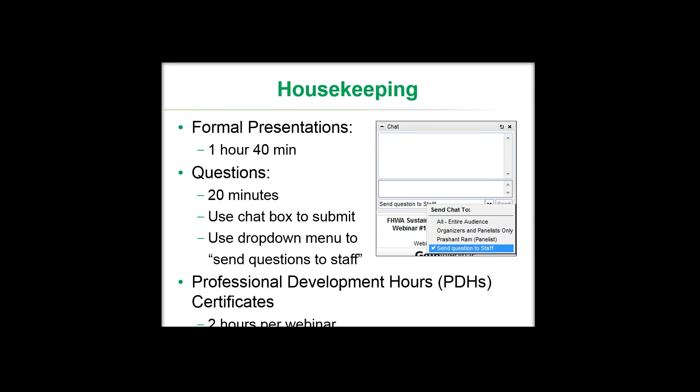As I mentioned, this is our second presentation within the webinar series. Several weeks ago, we presented an overview webinar on pavement sustainability and ways of assessing pavement sustainability. Today we're going to be focusing on sustainable strategies for asphalt pavements, covering materials, design, and construction aspects. Our speakers for today include Gina Ahlstrom with the Federal Highway Administration, Tom Van Dam with NCE, John Harvey with the University of California, Davis, Imad Al-Qadi with the University of Illinois, and Hassan Ozer with the University of Illinois. Again, my name is Kurt Smith, and along with Tom Van Dam, we'll be moderating this webinar.

So now let's begin the webinar by hearing first from Gina Ahlstrom, who will provide some background information on FHWA's Sustainable Pavements program. Gina?

Okay, good afternoon. Let's see. Okay.

So to start off, the U.S. DOT is committed to advancing sustainability in all aspects of transportation. Secretary Anthony Foxx signed a policy statement in June of 2014 that demonstrates this commitment. We are encouraged to consider sustainability in our policies, operations, investments, and research.

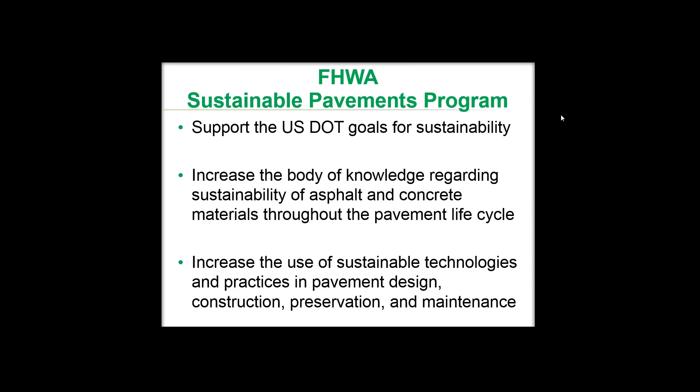The first order of business under the program was to define what sustainability means in terms of pavements and materials. It is necessary to give practitioners guidance and clarification on how pavements and materials fit into the broader concept of sustainability. The document Towards Sustainable Pavements, a reference document, is just that, a reference.

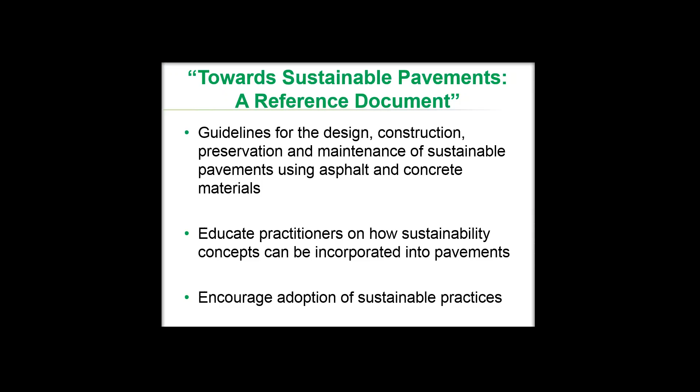It provides guidelines for the design, construction, preservation, and maintenance of sustainable pavements using asphalt and concrete materials. Its goal is to educate practitioners on how sustainable concepts can be incorporated into pavements, and it encourages adoption of these sustainable practices. What we're focusing on is what we can do today to incorporate sustainable practices into our pavements.

The document provides a comprehensive review of current literature specific to pavement sustainability. We had an extensive review of the document with input from stakeholders. And rest assured, this is a comprehensive document that benchmarks pavement sustainability today and helps us look at improving and moving that benchmark in the future.

With that, I will turn it back over to Kurt. All right. Thank you, Gina.

We appreciate that background. And with that, we want to now start moving to the main focus of our webinar today on asphalt and asphalt pavements. To begin with, we're going to have a presentation by Tom Van Dam, who will be presenting on materials and materials considerations of life cycle and aggregate materials. So Tom?

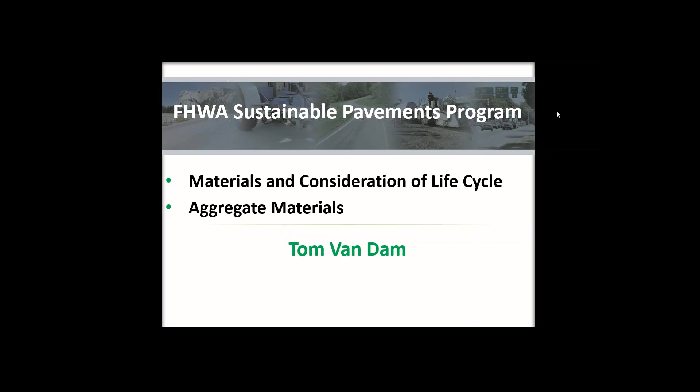Thank you, Kurt. It's nice to be the beginning of the focus.

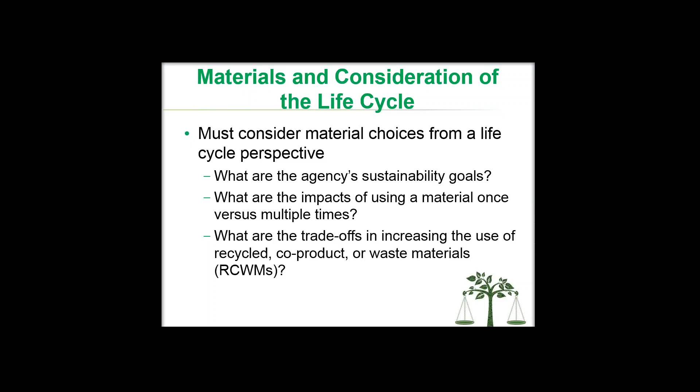These are worth talking about in a little bit more detail. There seems to be some subtlety between the different types of materials within this category, and that subtlety is important later as we consider analyzing the environmental impact of these materials using something like a life cycle assessment. A recycled material is one which is obtained from an old pavement and included in a new pavement. A very common example is RAP, reclaimed asphalt pavement, or recycled concrete aggregates, in which we take existing concrete and recycle it back into aggregate for a new pavement.

A co-product is a material which comes from another process, but that brings value. These are often industrial processes. A good example in pavements might be slag cement, which is pulled off of the molten slag coming out of an iron blast furnace, and specifically processed to turn it into a cement for use as a binder.

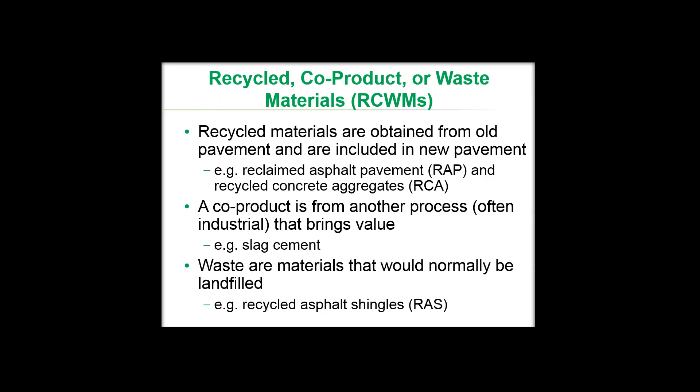Wastes are materials that would normally be landfilled - streaming towards the landfill, but that we can beneficially use. A very good example seeing increased use in areas which have a supply of asphalt shingles is recycled asphalt shingles, or RAS, where we can take these shingles, process them, and use the binder and aggregate in a new asphalt mixture. Something like fly ash in concrete is a little bit more complicated - it depends on region and quality of fly ash. It could be considered in some cases as a waste, but in most other cases as a co-product, as its value is greater than that of transportation and disposal.

When we look at the use of our RCWMs, a lot of questions arise. Does this material bring equivalent or better performance? That's a very common thing. What if the performance is slightly worse? That's a whole other consideration.

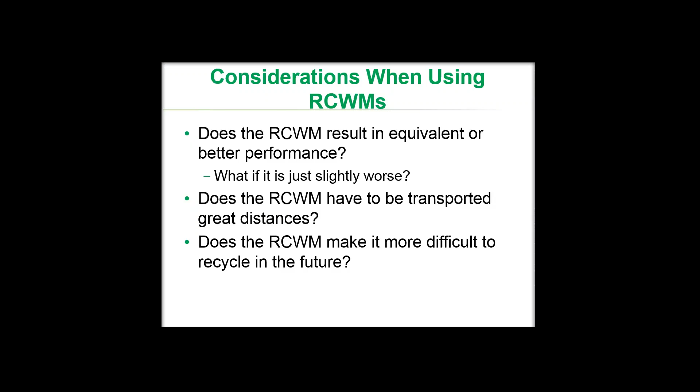Does the RCWM have to be transported great distance? I think this is one in which unintended consequences sometimes affect us, where an agency might specify a certain percentage of RAP or a certain percentage of recycled material being present. If you have to transport that material 100 miles to get it to site, any environmental advantage of that material may be lost - and in fact it may be a negative. Does the RCWM make it more difficult to recycle in the future? Sometimes as we bring in recycled materials in the next cycle, we may find ourselves in difficulty in how to address that in future recycling.

Other considerations we ask about materials: does the material increase construction variability? As we stretch out and look at different sources of more quote-unquote sustainable materials, is it something we're not used to working with, or will it impact construction? Does specifying a longer lasting material increase transportation or production-related impacts? And then how do we trade that off? Longevity has great advantages, but if obtaining that longevity requires big environmental impact up front, it might not work out as well as we would think.

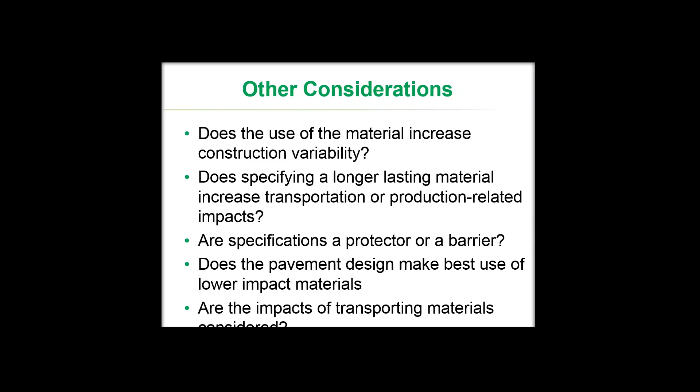Are specifications a protector of quality, or are they a barrier? Often we'll see many specifications that limit the materials we can use, and these can provide a barrier. But at the same time, specifications from an agency's perspective are protecting the quality. Does the pavement design make best use of lower impact materials? If our design system is all based on higher quality, more difficult to obtain materials, how can we bring in some of these lower impact materials into the design process? And are the impacts of transporting materials considered? We'll talk a little bit about that coming up.

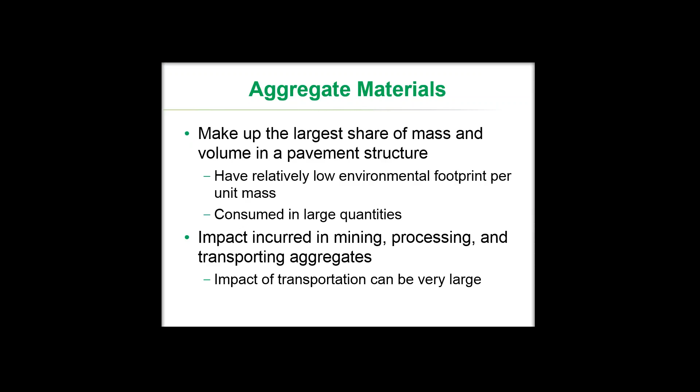Switching specifically to aggregates, they make up the largest share of mass and volume of the pavement structure. We use a lot of aggregate in our pavements, and they have a relatively low environmental footprint per unit mass, which is a good thing, but because we use them in such large quantities, their impact is not negligible. So as we look at aggregates, we look at the process of mining, processing, and transporting those aggregates, and the impact of transportation can be very, very large - that's becoming increasingly a problem.

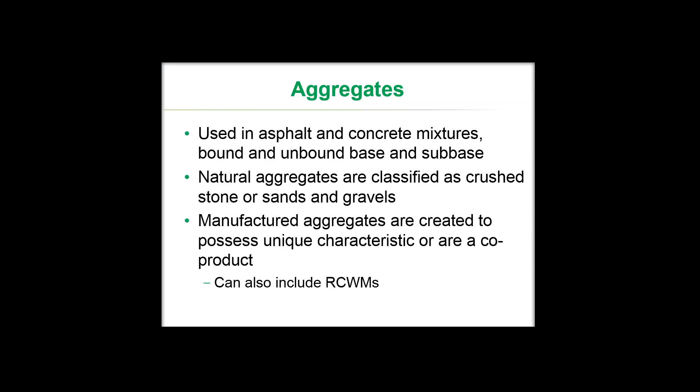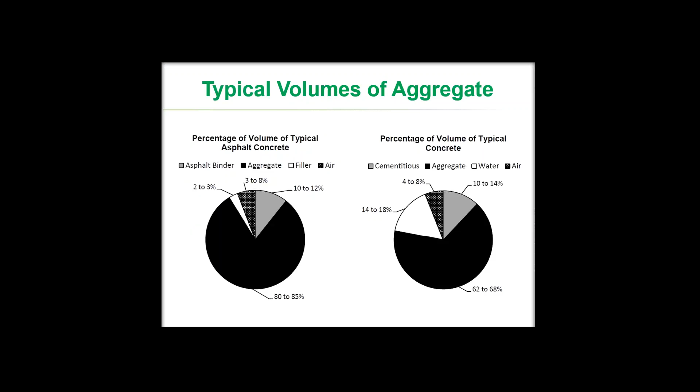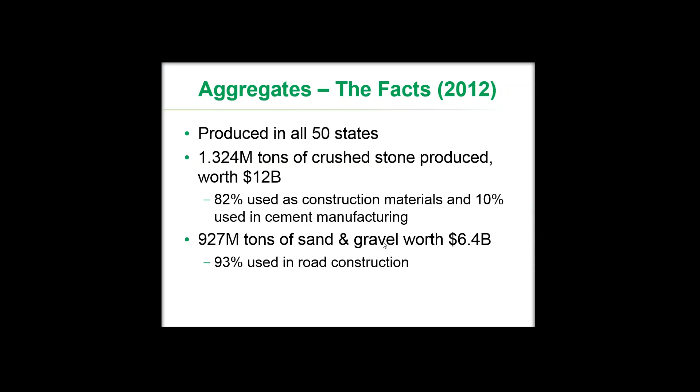Aggregates are produced in all 50 states. About 1.3 million tons of crushed stone was produced in 2012, worth about $12 billion. So this is not a small industry. Most of this material, the vast majority of it, goes into construction materials, or even 10% goes into manufacturing Portland cement. Less sand and gravel is produced at greatly reduced value, but still it's a very sizable amount of material. So when we look at these materials, the impact of a ton of stone is not that great, but the volume or mass of it is fairly extensive.

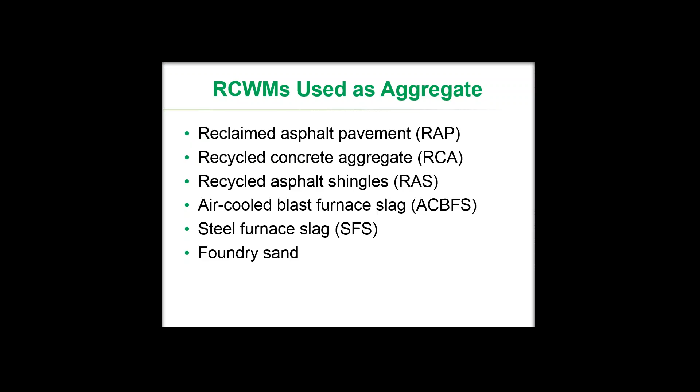When we consider impact, we primarily look at energy consumption and greenhouse gases. It depends really on the source of electrical power and transport distance. Crushed stone has greater impacts than sand and gravel. We also consider things like fugitive dust, water consumption, land use issues, community impacts, and all of these impacts really make it difficult to continue to mine or permit aggregate sources in urban areas.

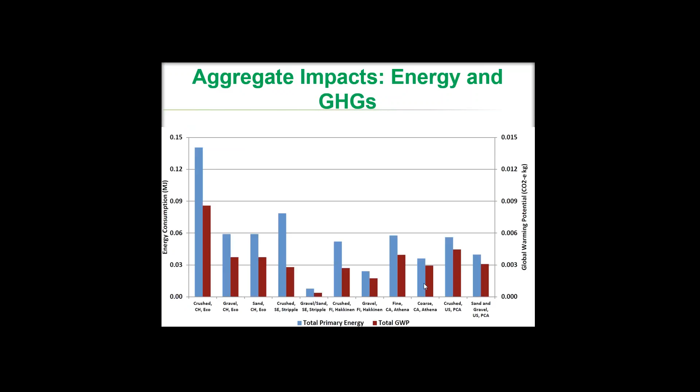This just shows a general chart, energy consumption on the left vertical axis, global warming potential on the right. The general trend here is that crushed stone has a higher impact than gravels for any given source, and that the impact varies depending on the study and location around the world.

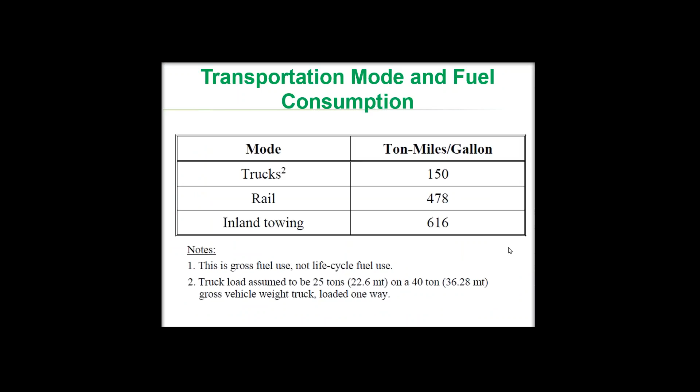This is what I was discussing regarding transportation mode. The one truth is that moving materials by truck is the least efficient way to move material, ton-miles per gallon. Related to fuel consumption is cost, but also environmental impact. So if we can use inland towing or rail, we get a substantial improvement in efficiency.

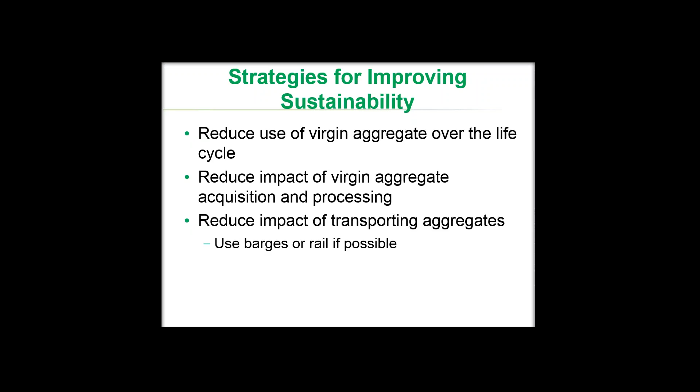So strategies for improving sustainability, we look at trying to reduce the use of virgin aggregate over the life cycle, reduce the impact of virgin aggregate acquisition and processing, and really focus on reducing the impact of transporting aggregates. Various strategies are discussed within the text.

I think a good example is the Illinois Tollway. They have committed to 100% recycling of their existing pavements. They look at trying to replace their binder in asphalt mixes by 40 to 60% using RAP and RAS, and we'll hear more about that a little later. They use the fine fractionated RAP as a binder replacement, and then they're left with stockpiles of coarse fractionated RAP, which they're now recycling into concrete pavements in the bottom lift of a two-lift system.

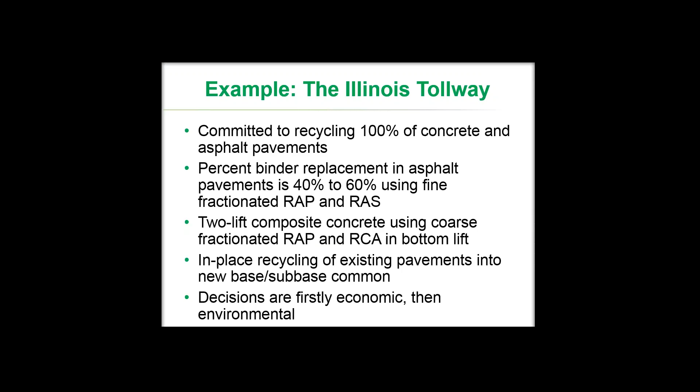They use in-place recycling whenever they can, and the important thing to emphasize here is that decisions are first economic for the tollway, followed by environmental. So although they're committed to the environmental benefits associated with the use of these materials, they're really looking at their economic bottom line.

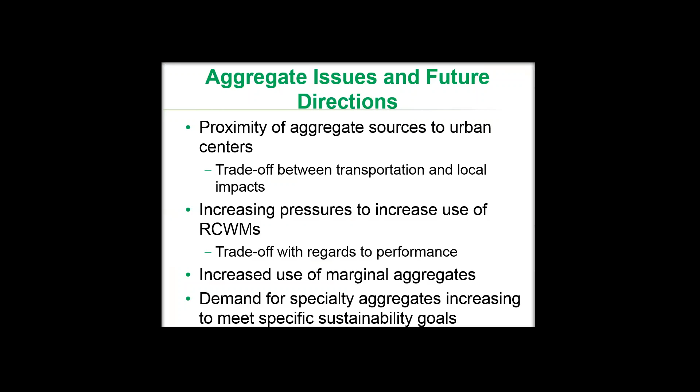As we look to the future, our big challenges are proximity of aggregate sources to urban centers, the trade-off between transportation and the local impacts on communities, and increasing pressures to increase the use of these RCWMs. There's a trade-off there between increasing use and performance of the pavement system. There's also increased use of marginal aggregates as premier aggregate sources become more scarce, and demand for specialty aggregates increasing to meet specific sustainability goals.

And that is it for aggregates.

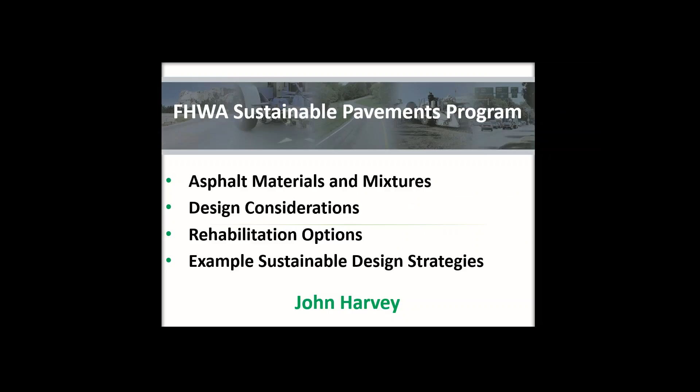Good morning, everybody. So we'll be taking a look at asphalt material mixtures, design considerations, rehabilitation options, and discuss a few example strategies intended to improve sustainability. The scope: first we're going to talk about asphalt materials and mixtures.